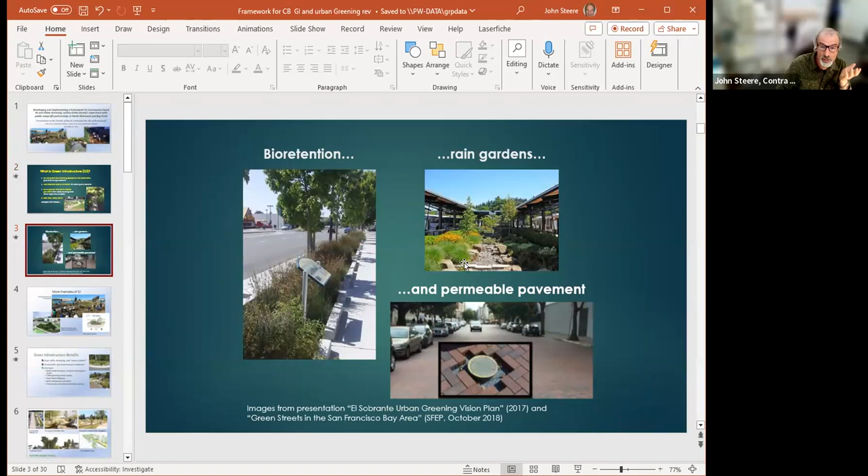And here's some examples. We have bioretention basins along the edges of streets, like this shown in the city of El Cerrito on the left, rain gardens on the right between buildings, and permeable pavement. Here's some more. Here's an example in Richmond, West County of Contra Costa, along the Central Richmond Greenway. This is Unity Park, which is actually a community-based park. It was founded by the Coastal Conservancy many years ago and has been actively putting in green infrastructure along the corridor that adjoins this, the Central Richmond Greenway, for many years now. Watershed Project and Urban Tilth are leading that. You can see an example of a rain garden here, a profile of it, showing how the plants and soil serve to filter the rainwater, stormwater.

So what's good about green infrastructure? And I'm using the term broadly here, as you'll see more examples of it shortly. But in the case of green infrastructure, as we think of it in terms of green stormwater infrastructure, it reduces, it slows down, it spreads the stormwater into the soil. It slows it down, and it obviously does filtration. That's this urban slobber piece here, and over time it's lower maintenance than, say, concrete infrastructure.

And the synergies here, that's where multiple benefit really comes in. You'll see this in the projects that are being sponsored by the county. In one case, the North Richmond Watershed Connections project, and where we're supporting the Contra Costa Resource Conservation District in Bay Point. There are multiple benefits, and all these synergies will be shown in those projects. Reducing urban heat island, providing active and passive recreation. Bringing nature into the city provides many benefits for health and well-being.

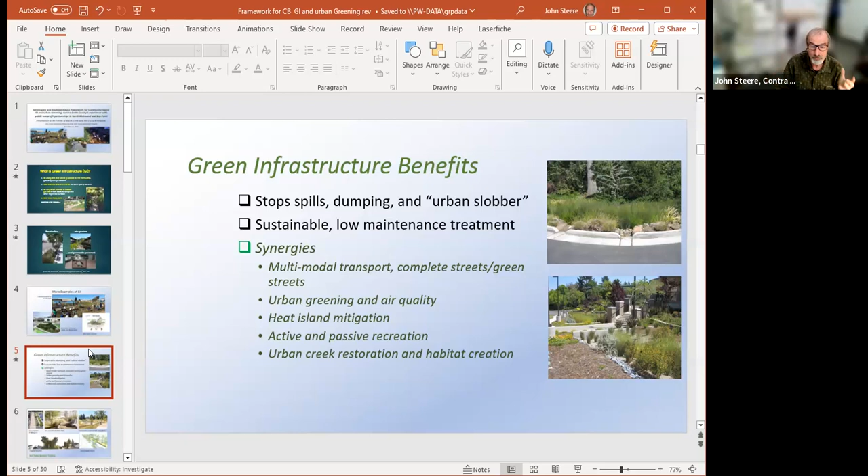Now, here's a broader view of green infrastructure. As you see here, pedestrian path in a park, stormwater channel next to it, bringing that into a park, vegetated buffer, that's more urban greening, and a green street or a complete street with green infrastructure.

Now, the foundation for our work, or my work as far as implementing green infrastructure around the county, is our green infrastructure plan. We're one of 17 GI plans in the county. City of Brentwood has its own, which Brentwood, I'm sure, will be happy to share with you. It's on their website for the city of Brentwood, but this one is on our website as well. And it really provides, as you see here, a kind of blueprint that is mutable, changing over time, of those GI opportunities around the county.

Now, the ones that will be shown here in the two projects that I'm going to present were priorities in our GI plan that was published 4 years ago, just before COVID. And we had a lot of community involvement in that, as well as within the county, we had a technical advisory group from many departments involved in this.

And that helped us going forward because we had folks from the planning department, we call it the county Department of Conservation and Development. They work with us closely to help identify GI priorities in North Richmond and work around them. And of course, other divisions in the county, like transportation engineering and engineering services, and other divisions that use it or relate to it or have to work with our watershed program to go forward with it.

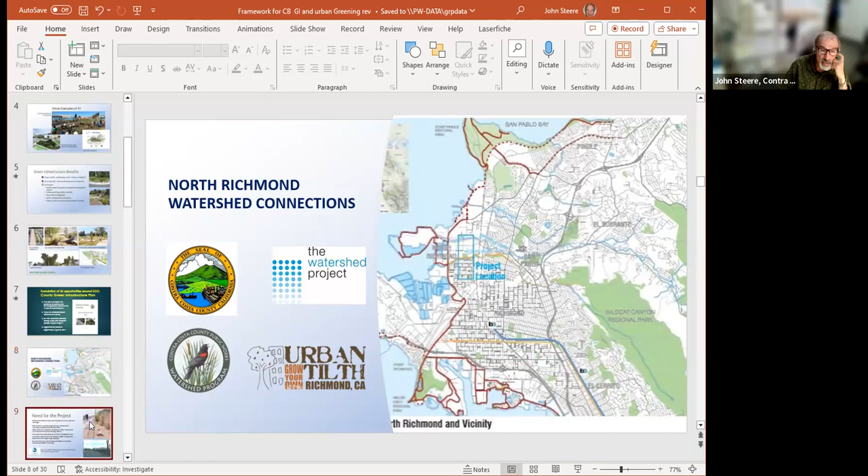And the project began about 8 years ago. I mean, literally began at the last Watershed Symposium in 2015. That's 2 symposiums ago, and we talked about it. I talked about it with my colleagues at the Watershed Project, and then I involved other folks as well. But anyway, the project was funded by a $900K grant back in August of 2019. We're just wrapping it up now in the next month or so, and I'll describe it shortly here.

But you can see why it was important to do it, because North Richmond is one of the most disadvantaged communities in the Bay Area. And it's built on historic wetlands of both San Pablo and Wildcat Creek, which come to the estuary in North Richmond, but it used to be further east than it is now. With all the fill, the estuary is much further west now.

So it lacked sidewalks because it was redlined during the 40s when it was first developed. So only African Americans were living there. They couldn't live anywhere else, and so it allowed for really not adequate infrastructure. And so there's ditches there, and there was a real lack of sidewalk strips and so forth.

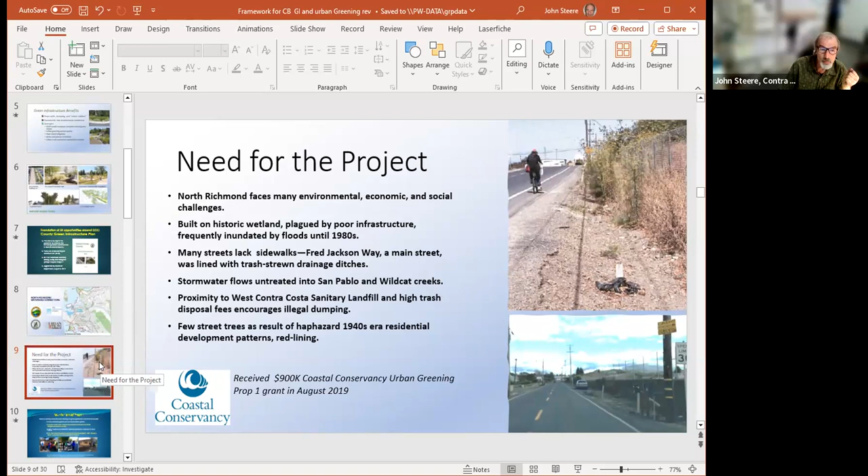So in a way, this is an environmental justice project, because we're really doing environmental enhancements, nature-based solutions, which are helping both for reducing flooding and increasing resiliency in the community at a time when climate change is really affecting all of our communities.

The foundations of this project are many sources. There were a number of community gardens; I was actually involved in helping with a couple of them. One was a native plants garden, but they were done by Urban Tilth and the Watershed Project, and a now defunct organization. And I should note here, for the benefit of the city of Brentwood,

the county was already funding the Watershed Project to do Adopt a Block, which was serving to reduce trash in the neighborhoods. We had the Watershed Project carrying these Adopt a Block programs on various streets to reduce the trash in Richmond, which is probably the worst in the entire East Bay. Why? Because we're very close to a landfill.

It's also a disadvantaged community, but the efforts of Adopt a Block, both before and now during the program, and creating a lot more beauty and stewardship of North Richmond, have reduced trash so that it's no longer a trash challenged community, which is quite exceptional. And I should mention here that the benefits of the project are also quite unique, quite extraordinary. And as I mentioned, the project is actually just wrapping up soon.

This is sort of when we were promoting the project back in 2019 to the Coastal Conservancy. Here's what we mentioned, that we're going to be expanding the urban forest, because North Richmond, like most poor or disadvantaged communities, has probably like 10% street tree coverage. So we're looking to increase the street tree coverage. We're improving and enhancing sense of place and sense of stewardship within the community, and awareness of the local resources, as in San Pablo Creek and Wildcat Creek.

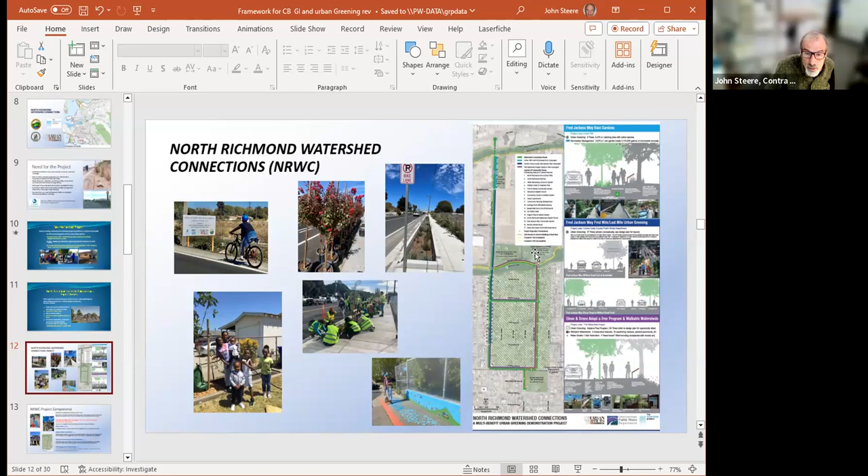Then in addition, we have the Clean and Green Walkable Watershed adopt a tree program that was a project of the Watershed Project. So you can see we had a partnership of two nonprofits, Urban Tilth with its Urban Tilth Farm and the Fred Jackson Way Rain Garden, and the Watershed Project. Let me go to the next one here.

So you can see here we've got Urban Tilth in green. Then Transportation Engineering led the first mile, last mile urban greening along Fred Jackson Way, and then the Watershed Project had a whole suite of projects that they're still working on, which will be finished in another month or so. Adopt a tree, planting close to 40 street trees, mostly in front yards, because there's not enough room on or next to sidewalks. Walkable watersheds, cleaning, outreach, education, and community engagement. You'll hear more about that shortly, because it's a very interesting set.

So the first component here is Fred Jackson Way Rain Garden, and this is, as you can see on the right here, adjacent to the North Richmond Urban Tilth Farm. The land of the Urban Tilth North Richmond Farm was formerly that of the Flood Control District because it is adjacent to San Pablo Creek. It was leased to Urban Tilth, and they recently purchased it, as in last year. They've actually expanded their holdings to expand the Urban Tilth Farm this year.

They added another 5 acres, and we approached them. Well, actually, they approached us. We said we'd like to have them involved in this North Richmond Watershed project. Back in 2018, they said, "Yeah, we'd like to be involved. We'd like to do a rain garden along our frontage, and we'll maintain it. We'll actually raise the money to build it too." So we said, "Great, you'll be part of our team then."

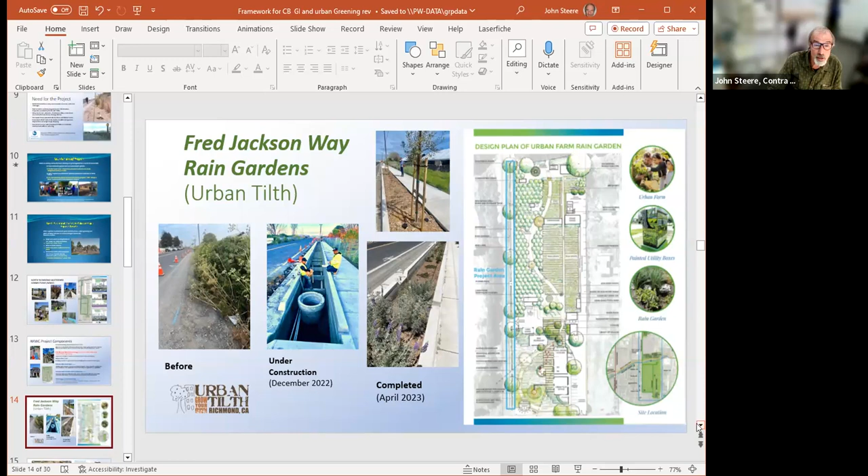And as I mentioned before, that will not be maintained by county workers. It will be maintained by Urban Tilth members. They're called Basins of Relations crew members, and it's sort of a workforce development team.

Now we're on to, oops, let me go back. Let's go on. Now we're going on to the work of the Watershed Project, and it's adopted the walkable watersheds, created an urban nature loop, also known as a safe routes to school. Well, one part of the safe routes to school, as you see on this map here: the portion of North Richmond that is south of Wildcat Creek is residential. So the destination there for safe routes to school is Verde School, which is kind of in the middle of that image here, right here.

So when students and their parents are walking to school, they're going to be walking shortly with new trees as we focus the street tree planting along this corridor. And there's also, as you will find out shortly here, QR codes and identifiers for what happened there historically, as well as when it was formerly land of the Chochenyo tribelet of the Ohlone people, native peoples. And then up here, another destination is the Fred Jackson Way Rain Garden.

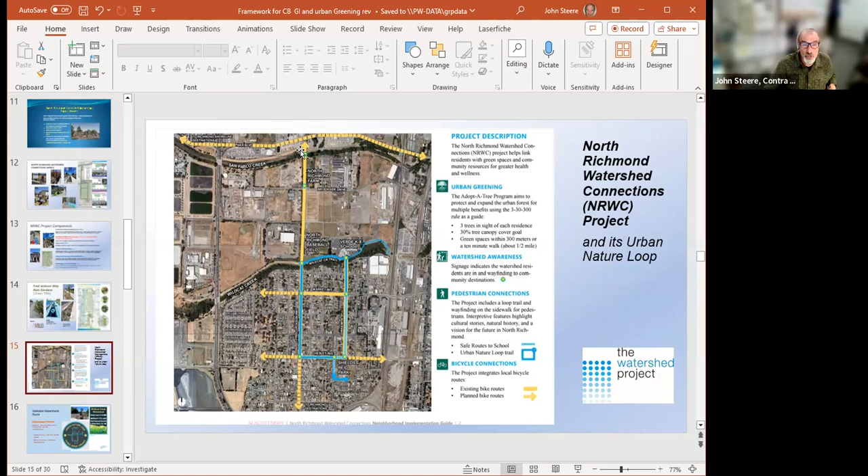So if you go further here, you can see here we have 2 loops. You have the loop that goes just to the Fred Jackson Way. I'm sorry, the Verde School along Wildcat Creek. And then if you do a wider loop, you go out to both the fish ladder at Wildcat Creek, and then further up to San Pablo Creek and the Fred Jackson Way Rain Garden.

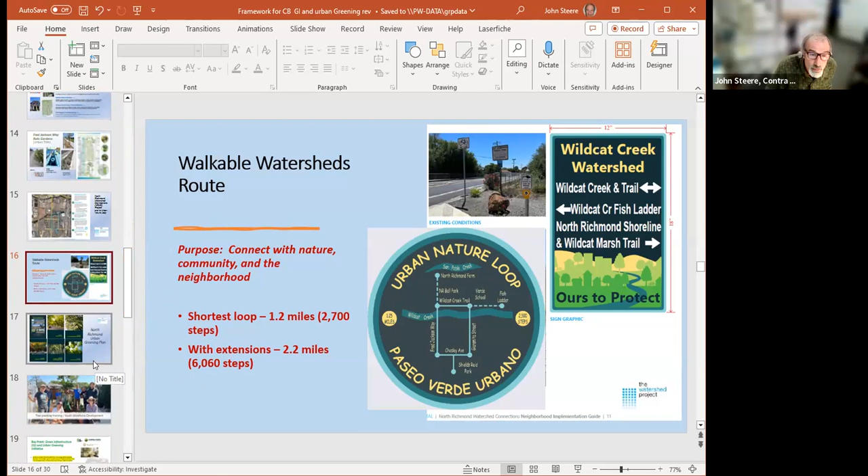So bringing nature into the community of North Richmond helps people. So this project is really helping people's health. It's getting them connected to the watershed and enhancing their capacity for stewardship. It's a vivid demonstration really of how to take an integrated approach through installing green infrastructure, planting street trees and adding other elements to really enhance the health of residents and San Pablo and Wildcat Creeks. Really taking a broad view of how watershed thinking helps.

As I mentioned here too, with workforce development, Urban Tilth has its Basins of Relations staff, and the Watershed Project has its green collar corps, which works both for the county and on behalf of residents there to plant street trees in this case with residents.

And looking back here, they did an urban greening master plan, you might say, which is the first in the county, and it'll be the first of many to come because our new general plan requires that to happen. In other words, it requires that we do a master plan of street trees, because why? Climate action. Climate change and the need for reducing the urban heat island effect, especially in hot areas. As you know, out in Brentwood, it's gotten hotter than ever over the past 20 years.

And of course, the same is true in North Richmond and in Bay Point, where we're also doing a project with the RCD. So anyway, moving now on to our next project, because I do want to leave enough time for Sarah to give her presentation, which will bring everything that we're talking about back to where you live and in and around Brentwood.

Well, now we're getting a little closer to Brentwood here. This is a project that was led actually by the RCD, who's hosting the meeting tonight. And I've been working with Hyphae, who was a consultant to the RCD, and specifically with Chris Lim and a couple other staff at the RCD in developing this over the past 3 years. This was a project in development for the past 3 years.

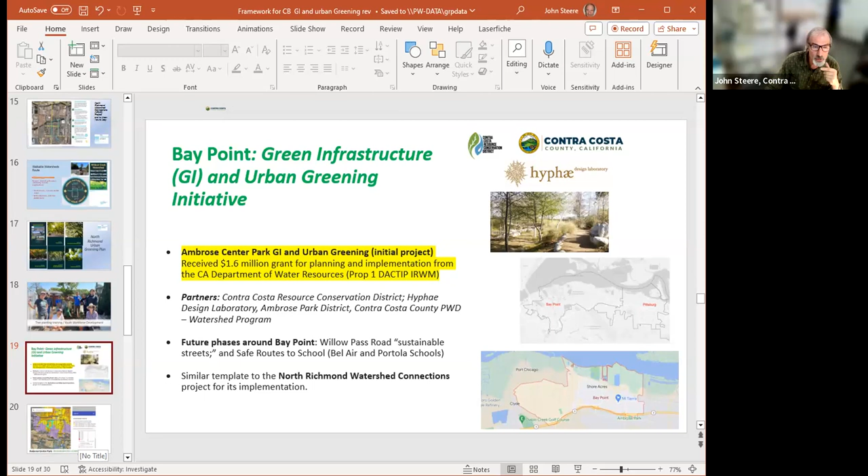And this too, like the North Richmond Watershed Connections project, which is really a template for this project, will also be maintained in a community-based approach. In other words, the GI features that are being developed here will be maintained by the RCD, their own versions of Green Collar Corps. And hopefully they can get this funded through the mitigation funds from the Keller Canyon landfill.

So here's the context for the actual project, which is in Ambrose Center Park, the GI Urban Greening project there. You can see from this that there's a high water table. They've got some groundwater problems because it's a former industrial area. And so the GI here will also reduce flooding issues and reduce potential toxins from the soils.

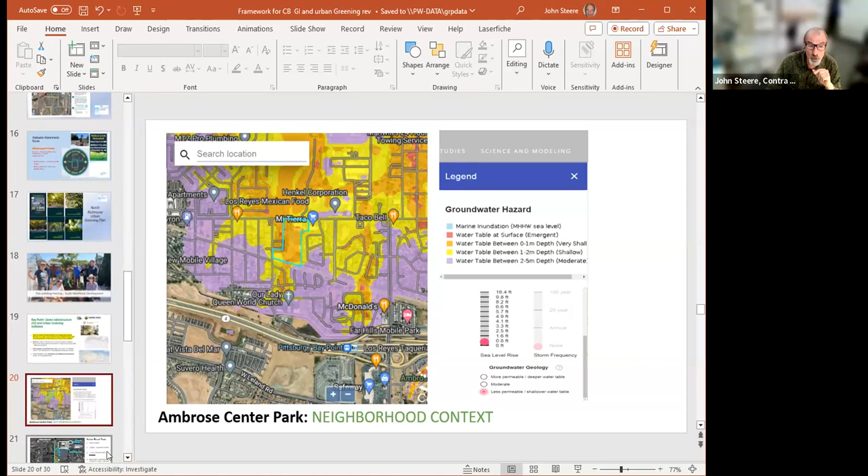This analysis, by the way, I'm showing for these slides, was done by Hyphae, who is the consultant to RCD. I must commend RCD as well for hiring Hyphae because they're a tremendous, very innovative ecological engineering firm. And so here's kind of a summary image of the Ambrose Center Park opportunity here for GI and urban greening.

And now the analysis of why we needed the green infrastructure in and around the community center. I should go back here. You can see the community center is in the front of the photograph, next to Willow Pass Road. That is very well used. It's sort of the center of Bay Point. But there's flooding around that in the parking lot. You see the blue areas here and over here and here. The parking lot floods.

So that's why we're recommending to have GI features, permeable pavement and so forth, and street trees and what they call Filterra trees there along here. And then there'd be GI here and these drainage patterns coming down here. The flooding in the park and the ball field. So this GI will help reduce flooding.

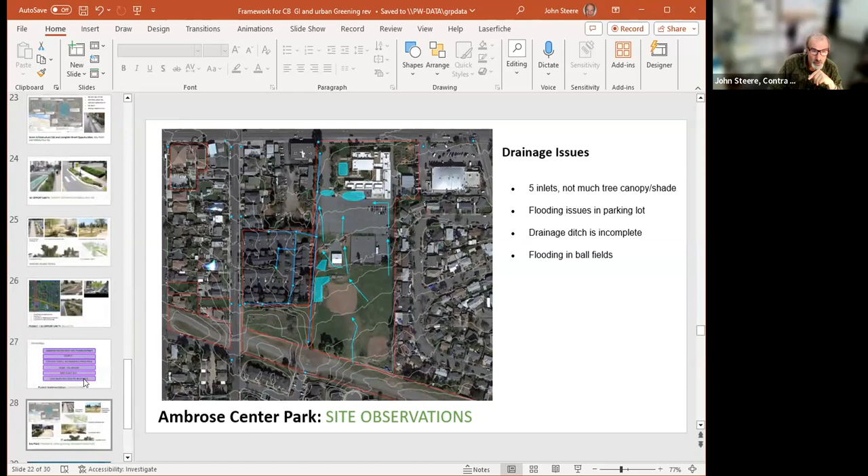Let's see this project in the larger picture of potential GI opportunities around Bay Point. Now, our project here is not quite in the middle. It's right here, where it says right here. It's sort of like 1, 2, 3, 4. The fourth one over is the project where we received the funding for. But as you see here, these are all drainage areas for proposed GI.

So in other words, all the stormwater that would flow onto the impervious surfaces in these blue shaded areas will be captured by the GI features in this figure. So there's some other opportunities here, which I won't go into. Huge one over here for another existing park, Anuta Park. That's probably the next one up. There's also a really great project for Bel Air Elementary School and another one up here, Portola, which the RCD is looking into now.

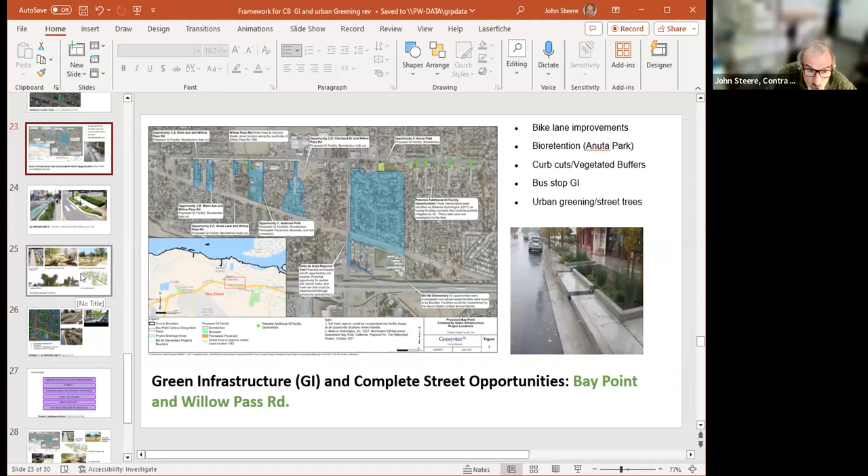This analysis was done by our firm here called Geosyntec, but Hyphae will be working with them. Who knows whom the RCD will work with to develop their GI, probably Hyphae, but they'll probably coordinate with Geosyntec to identify the work to be done. Here are other opportunities besides the one that's getting funded here.

Going forward, Willow Pass Road, GI at bus stops. I should mention that the county recently missed by a couple of points getting a green street along Willow Pass Road, but we're going to be resubmitting it shortly to Caltrans and hopefully get funding for that. So that'll help us to implement a green street, as you might see here.

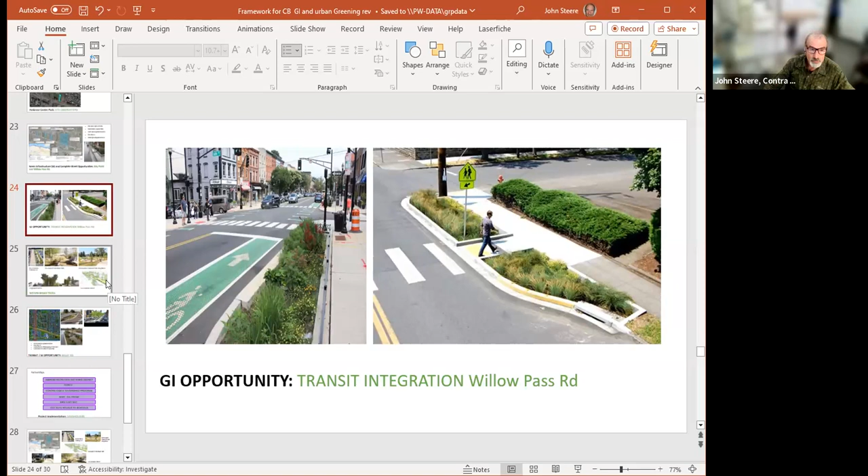So then you have, the county is involved in doing a green street and complete street on North Bailey Road, from Route 4 all the way down to Willow Pass Road. So that's underway in terms of planning. It'll probably be built out in the next couple of years.

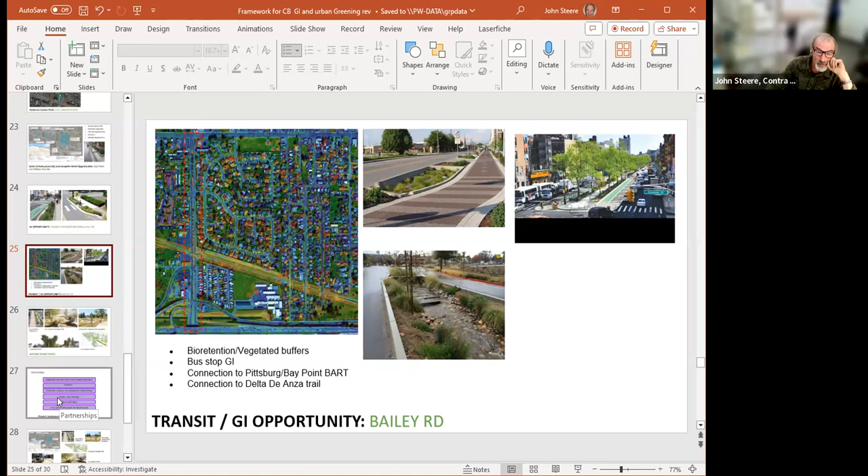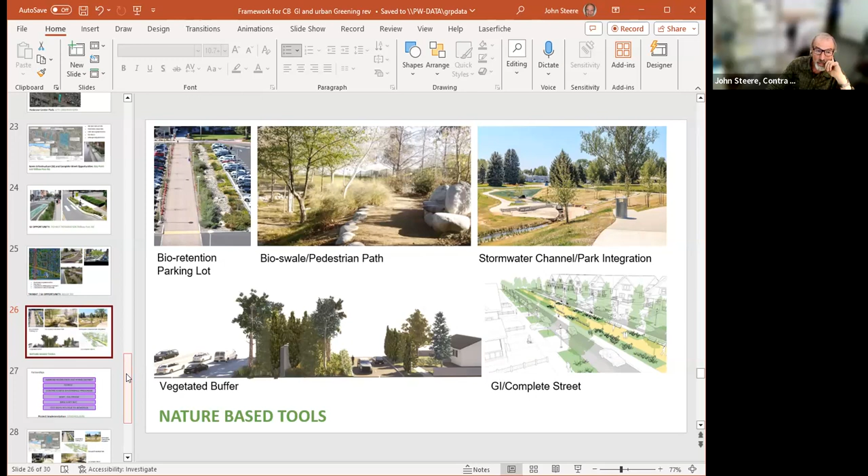Whenever you're doing GI along a right-of-way, you might want to think about making bicyclists more protected by having bike barriers that are green infrastructure. We're seeing that on Rumrill Boulevard in the city of San Pablo now, and places in Oakland. And we'll see it also on Bailey Road here in Bay Point. And of course, Bike East Bay has been supportive of that and happy to press for that.

Safe Routes to School will be involved in helping to work out this project, as well as future projects in Bay Point. Okay, so here again, we see the potential nature-based tools they'll be using. This is the wider look at green infrastructure as essentially a nature-based improvement. We have green stormwater infrastructure, but we also have other types that we see here.

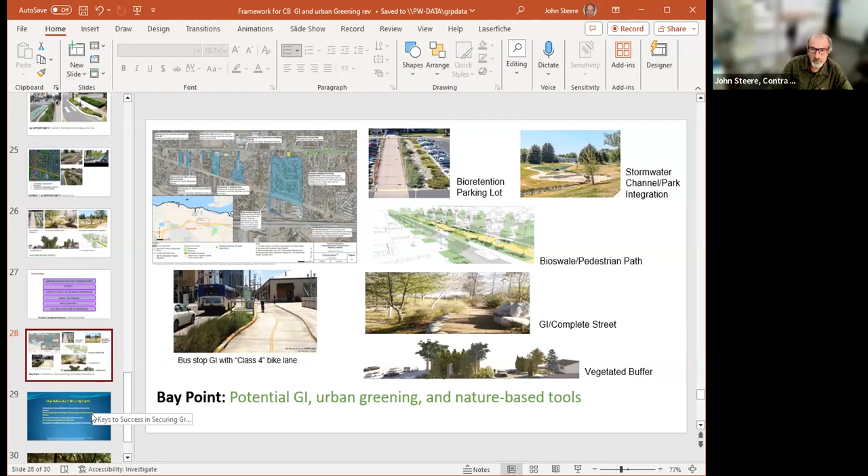In addition, there's a San Francisco Bay Water Quality Fund. The Coastal Conservancy, as you know, has funding, the Department of Water Resources, and all of them are calling for multiple benefit projects, and they're also calling for collaboration with nonprofits.

That's one thing we're seeing more and more. When I did this slide originally back in 2019, this was just beginning, but now it's becoming a requirement. So this is true for the city of Brentwood as for any city in Contra Costa or anywhere else. As they go forward with requesting funding for green infrastructure or other urban greening projects, they need to have multiple benefits. They need to work with community-based organizations to accomplish this work.

So this has always been a prescription for success for the county and the RCD as well, of course, in the projects that I've talked about here, the North Richmond Watershed Connections Project and the Bay Point Urban Greening and Green Infrastructure Project, which is the first of what will be future green infrastructure and urban greening projects around Bay Point.

All right, can you all see that? I'm going to try to go full screen. We'll see what happens. I may have to come back. Hold on. Presentation. Slides. Oh, here we go. Okay, let's see what happens. All right, can you see that? Yeah, now you can see all your slides. Oh, you can see all my slides or just one? Looks like all your slides are on now. Your view before was actually a little wider. Oh, okay. This is kind of weird for me too. Hold on a sec. Let me get out of this. Okay, hold on a sec.

While Sarah is doing that, I'll also mention one thing: Sarah was very much involved working with the county flood control district, of which I'm a part. In other words, the Contra Costa Watershed program is part of the county flood control district. American Rivers was working with the Friends of Marsh Creek to develop the Three Creeks project, which she'll be describing to some extent here.

Okay, does this work? Is that better? Yeah. Great. Okay, thanks everyone. John, super interesting. That was really great hearing about it; I hadn't heard about the Bay Point project before.

And for those who I don't know, my name is Sarah Puckett, and I work for an organization called American Rivers. We're a nonprofit environmental organization whose mission is to protect and restore both small urban streams to large rural waterways for fish, wildlife, and people. And today I'm going to be talking about the green stormwater infrastructure that John talked about, but along Marsh Creek, and specifically on the Three Creeks project.

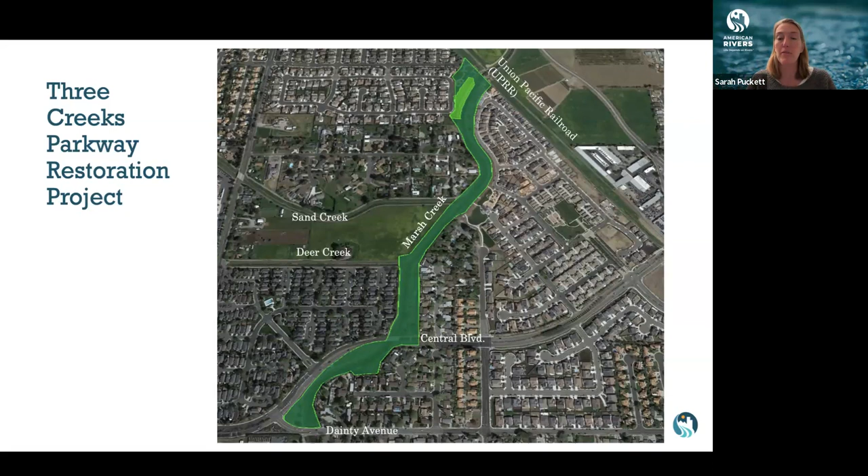I'm not going to go into too much detail about the Three Creeks project, but this was a collaboration, as John mentioned, with Contra Costa County Flood Control and Water Conservation District, and many, many partners: the city of Brentwood, Friends of Marsh Creek Watershed, the Contra Costa Resource Conservation District, and East Bay Regional Park District. Many people over many years came together, and it's a very long project. It goes from Sungold Park all the way to Dainty Avenue, and the project expanded the Marsh Creek channel to make room for both floodwaters and trees.

So I'll show you some pictures here. This is standing at the pedestrian bridge at Sungold Park looking upstream, and this is before project construction. I just wanted to point out a few features. You can see this fence here along the right side. This was kind of an old style water quality basin before green infrastructure really came to the forefront. This was how old water quality basins used to be built, with a big fence.

And actually the Friends of Marsh Creek, back when this development was getting started, really advocated to locate the park adjacent to the creek. And on the left-hand side of this photo, the Friends of Marsh Creek worked really closely with that developer to locate all their required parks adjacent to the creek. And one of the biggest wins, I think, was to face the houses toward the creek, because when you are traveling along the Marsh Creek trail, most of the houses are facing away from the creek, and there's a big fence in the backyard. So both of these developments really highlight the creek as an amenity.

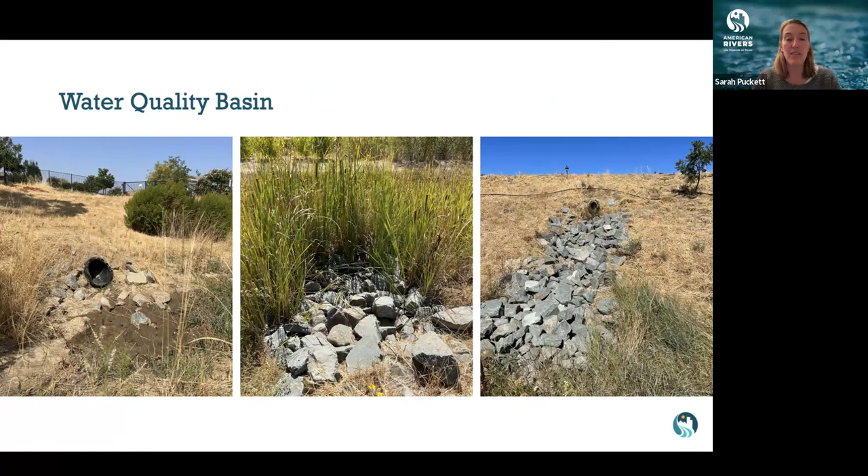And the next one is this bioretention facility. When we were looking upstream on the left-hand side of the creek, the Palmia development where the houses all face the creek, they were required to put in bioretention facilities, which is a green stormwater infrastructure facility. And they used this rock, and I think it's really pretty. The average person walking by would just think it was a nice little Zen rock garden, but it's actually a bioretention facility.

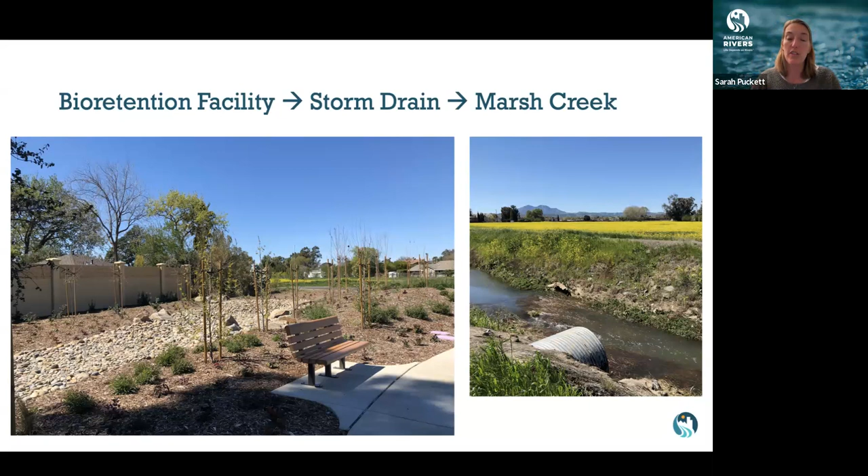So the water pools here when, in a small rain or dry weather runoff from the streets, it pools here and then filters into the ground. And then on the right-hand side, the water eventually drains directly into Marsh Creek.

And then another stormwater facility that you would barely notice is also in front of the Palmia development. It's between the houses and the street and the trail. And there's a long linear strip that has a lower elevation than the trail. So that's another place where water will gather and soak into the ground, and then once it's cleaner than it would have been had it just run off directly, the stormwater pipes will discharge it into Marsh Creek.

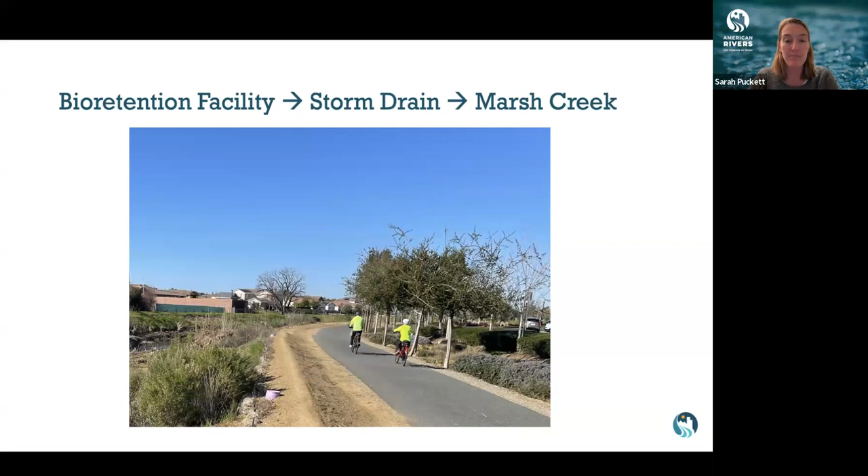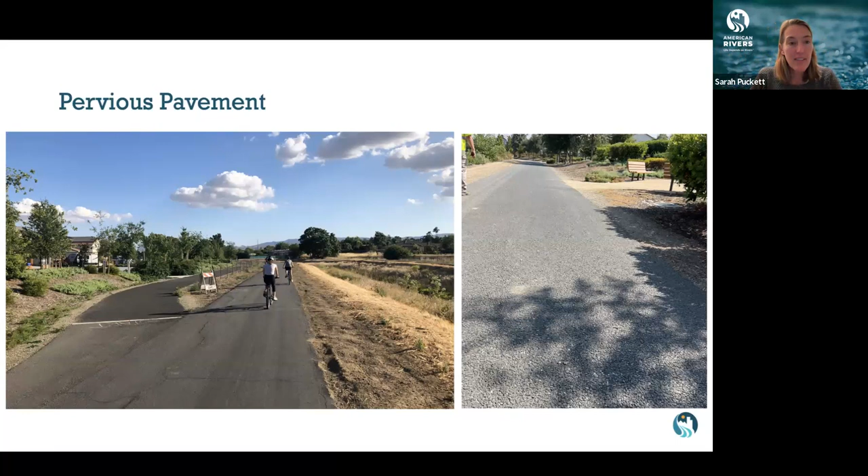So it's a little rougher, and you can really tell when you're a trail user, like the skateboarders don't love it. On a bike, you probably wouldn't notice it, but if you were to take a bucket of water and pour it on the pavement on the right-hand side, it would soak into the ground and be treated. So those are some of the stormwater features along Three Creeks.

And I just wanted to advertise that we're going to be going out to Three Creeks with the Friends of Marsh Creek and the RCD on Saturday, December 2nd from 9 to 11, and we will walk along Three Creeks and check out some of these facilities in person. So I think that's it. Happy to take any questions. Yeah. Any questions for Sarah?

Sarah, if I could ask a question, I was interested that one storm outlet looked as though it had some bulrushes growing right in front of it. And I always thought they were about the world's best trash capture device, especially for plastic. You can go in there in one spot and pull all the bottles and plastic wrappers nicely wrapped around those rushes.

True. Yeah. The stormwater facilities do capture a lot of trash, and hopefully they'll capture that so it doesn't end up in the creek.